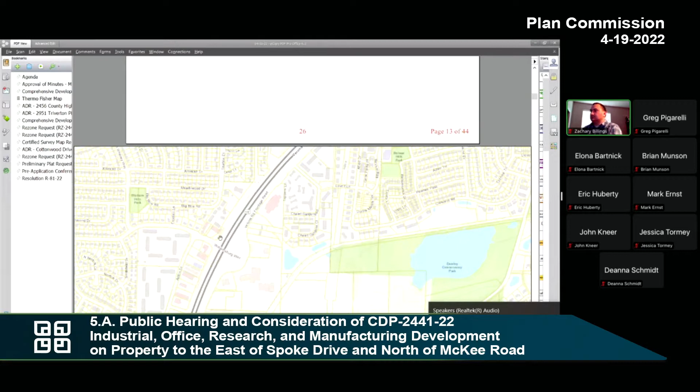I messed this up, a little hard to see. It's a little easier on the TV screens, I think. Yeah, and it gets washed out a little bit on the big screen. It's really hard to do it on here.

Can you guys pull that one up easier? Yeah. Just so the public knows, we are working on improving the projector in here. It's in the budget. Boy, I'm just losing everything. I'm sorry.

There you go. Oh, you had it. Yes, that's the one, thank you.

And the bike path is going in the middle of those 4 colored parcels, is that correct? Yes, that's the Badger State Trail reference. And the red piece is what they are piecing off and it sounds like plan to sell. Correct.

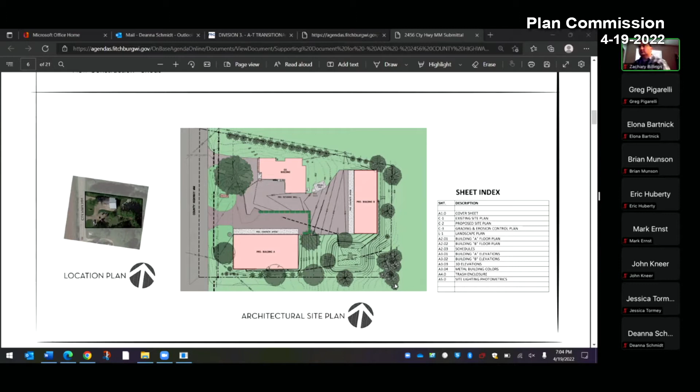The second building would be used for field operations and safety and training operations as well. That was basically it. That's it? Okay, yep. Can you do a staff report, please?

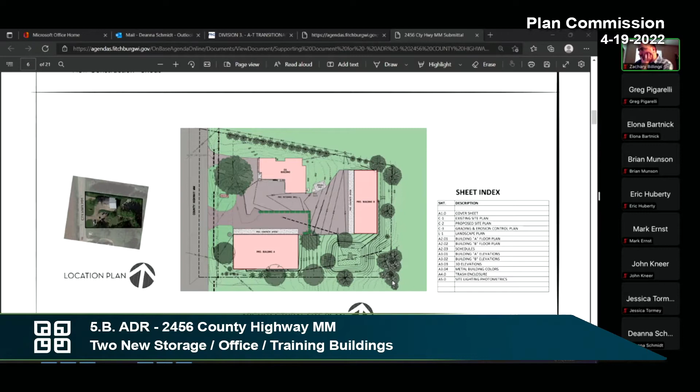I certainly can. This is 2456 County Highway MM. The applicant is requesting approval of an ADR for 2 new 1-story commercial buildings. Building A will be approximately 112 feet by 60 feet, and Building B will be approximately 110 feet by 40 feet. The development would also include some new asphalt paving and bioretention. This property is located predominantly in a residential area. The future land use map does not include this parcel within a future neighborhood planning area. Therefore, the future development of this parcel is going to be limited.

I realize I left something off there. The original application proposed 2 buildings, one of which would have had 4 new tenants. I brought to the attention of the applicant that this was not possible under the rezone and conditional use permit granted in 1994. That conditional use permit was granted to allow a contractor's office, shop, and yard, and staff believes that the current business, B&B Quality Building Restoration, is consistent with the original CUP. However, staff believes that it is not possible to add any additional businesses on this site. So the project was revised and brought forward to Plan Commission with just the one B&B Quality Building Restoration to remain consistent with the original CUP.

So staff recommends approval of this ADR with the following 12 conditions. All right, questions, comments from Plan Commission? That's it all. No one?

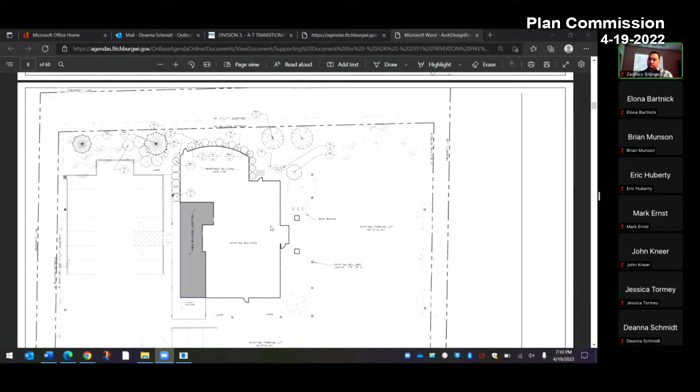And then interior, the current bar area of Liliana's, we're looking at redoing and turning into Ollie's, and then the northern part, that's our dining room, and that entryway area we're putting in, that'll be called St. Charles Station, so that I can finally have all my restaurants named after my kids again. So that's what we're doing.

And it's gonna be super cool, and no one knows about it, so all 39 people watching this on TV right now, shh. Could be 50. Could be 50. All right.

You want to do a staff report, please? So, 2951 Triverton Pike, and that's Liliana's.

The proposed development will add approximately 1,000 square feet and remodel approximately 1,800 square feet of the existing restaurant. The project will also include exterior renovations, which you'll see in your packet. The interior renovations will also allow Chef Dave to elevate his restaurant to fine dining. No additional seating is proposed, and the expansion is located on existing pavement, so there's no impact to the current impervious surface ratio.

The limited addition is unlikely to have any negative impacts on neighboring properties, traffic, or parking. The proposed exterior renovation is consistent with the previously approved ADR. Therefore, staff recommends approval with the following 9 conditions.

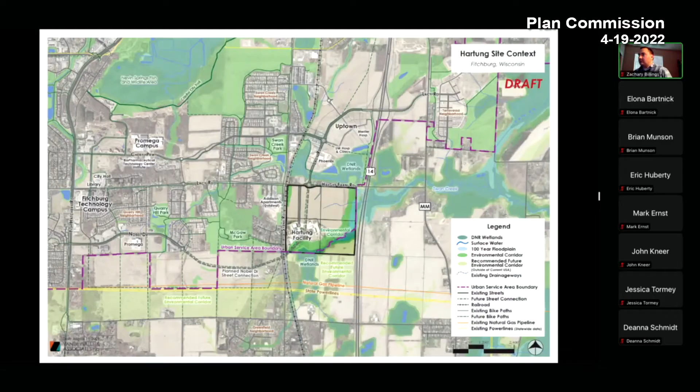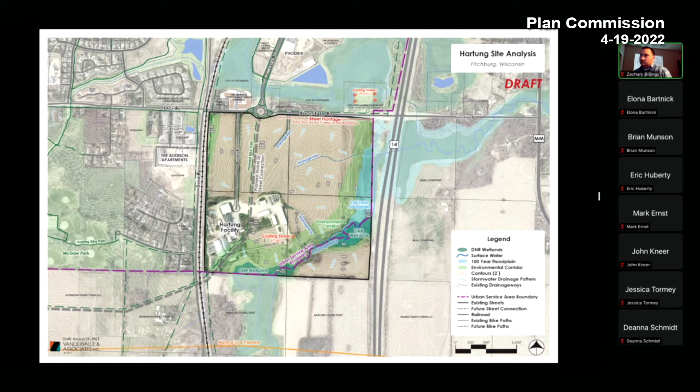As Jonathan noted, here is our location at the southeast corner of Lacy and Haight Farm. A little closer, you can see some of the existing conditions, with the Hartung facility in the southwest corner of the site, the creek and wetland complex that moves through the site, and then some of the existing plan recommendations. That's really where we started, looking at what the plan calls for, and how that relates and transitions to the geography of the site.

The CDP in front of you tonight really is that first step towards seeking zoning in the future for the site that would implement the recommendations of the adopted plan. And this is what it starts to look like in physical form.

What we're looking at here is between 450 and 500 apartments and 20,000 square feet of commercial space, coupled with the primary driver of the site being between 500,000 and 600,000 square feet of potential future employment, ranging from medical technology, office, and some logistics components on the site. So really building up from the concepts of the adopted plan and placing that into the site itself.

The other aspect of the site really falls in two directions, and that is the existing Hartung facility, which will stay in place and stay in operation as part of the development of the site.

So you can see a majority of the southwest corner will remain as is, with the only changes really being focused on how that is accessed.

The final piece of the site is the open space components. Again, as recommended in the adopted neighborhood plan, we have significant buffers along the native habitat areas, including buffers adjacent to the farm wetlands in the northeast and northwest corners of the site. So all in all, we're delivering an open space system that we look forward to working with the community on how to design, but we see that as an outdoor room that would serve both trail connections in the future for the region, as well as residents and employees of this site. We're excited to have that open space be a really critical component of the walking space of this neighborhood.

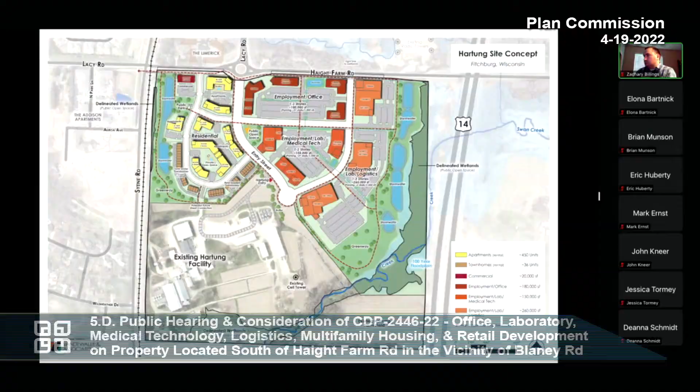Brian did very well and covered all the high points. The one thing that did come up in some of the staff discussions very early on was the buffers from the wetlands. The McGaw neighborhood plan delineates a 75-foot buffer from the wetlands on the northwest portion of the site and a 300-foot buffer from the wetlands on the south branch of Swan Creek, to the southeast of the site. You can see the wetland complex and then Swan Creek.

We've worked through that, and throughout the wetland complex to the southeast, there is a minimum of a 200-foot buffer with an average buffer of 337 feet. This recognizes the fact that the northern portion of those wetlands, as Brian mentioned, were farmed. Staff feels that the proposed buffers accomplish the goals of the McGaw neighborhood plan.

The other note I'll bring out is that there are things to be determined down the road in the future, and that would be establishing a connection between Lacy Road and Nobel Drive. That's not something we can really dive into at this particular point with the existing Hartung facility. So staff recommends approval of the CDP with 7 conditions.

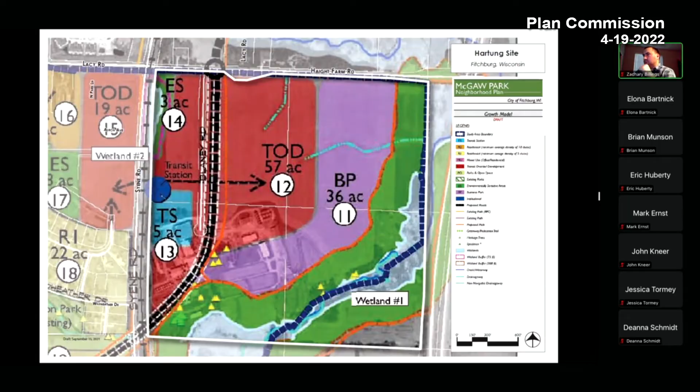So from the standpoint of timing and the availability to have that in the future, should the city determine that's in their goals, that's not precluded by this. That is preserved by that site remaining in use. I believe one of the staff conditions was that, in the event the Hartung facility was to be redeveloped, that would be a discussion point that needed to happen at that time. So we're certainly respecting that in the plan and reserving that space for the future should that need arise.

All right, very good. Thank you for the clarification.

Other questions or comments? Yeah, Emily. I really appreciate that clarification on the transit. But the one thing that concerns me is, if it's 10 years from now, 20 years from now, prices will have gone up, most likely for the land. So then it kind of puts the city in a position where we'll have to pay a lot more for it if we want to develop that as transit.

I'll just say I really appreciate that it does follow the plans that have been in place for quite a while now. I think we see that sometimes where people come in and want to do something completely different, and when we're planning, it's a challenge to have that happen. And I know there is a lot of demand for, well, apartments—unfortunately, but not that apartments are terrible, I just like single-family housing or more of that as well. But this is a transit-oriented neighborhood, so unfortunately it leads to more of the higher density development that we have in something like Uptown.

But I'm really excited about the potential for new businesses to be able to come to Fitchburg. We have a lack of bigger properties available for businesses, and we do get requests from businesses looking to relocate asking what kind of larger pieces we have. There's not a lot of those in Fitchburg right now, so to provide this as an option for those businesses, I think is a great advantage. There's great visibility to Highway 14, which is very attractive for those businesses, and the Lacy Road is right there and goes right to that interchange.

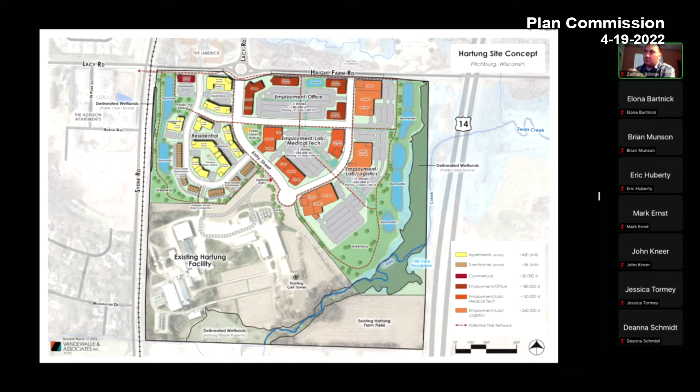So I'm happy about that, I really love that part. I'm excited about that. This is already in the urban service area and has been planned for development for a while. So it's only natural that this would be an area that was planned to be developed and is going to be developed over a period of time, obviously, because Hartung isn't going away anytime soon.

Stephen: Question for city staff—since most of this property on the future land use map is designated for TOD, transit-oriented development, can you walk us through what the original intent was for that? Mixed use, high density, residential, commercial, retail, office—more of a downtown kind of feel. Okay, thanks.

Other questions or comments? Rich? The housing comments we've heard—it's like a chicken and the egg thing, because in order to attract business we want to have the housing, and they go back and forth. But I looked at the Zimmerman's housing study from 2018 earlier today, and at that time we already were among our peers, had one of the highest percentages of renters of all the peer communities.

I think this will soon be passed, but I think as a group we need to get together and start talking outside of these issues of how we want to address this so we can all be on the same page. Yeah, I don't want to get too off topic.

In my budget right now we have plans to start neighborhood planning for both South Stoner Prairie and Greenfield, just south of this. As we develop those neighborhood plans, that's a big thing we have to factor in - we're over 50% apartments in housing units in the city right now, and we're the only community in Dane County in that situation. What I hear from residents is concern about where that balance is. As we develop those plans, we need to make sure there's ownership opportunity available to balance that back out. My point is, it's not to be put on their shoulders - that's something we have to deal with, not say this is what we want you guys to solve for us.

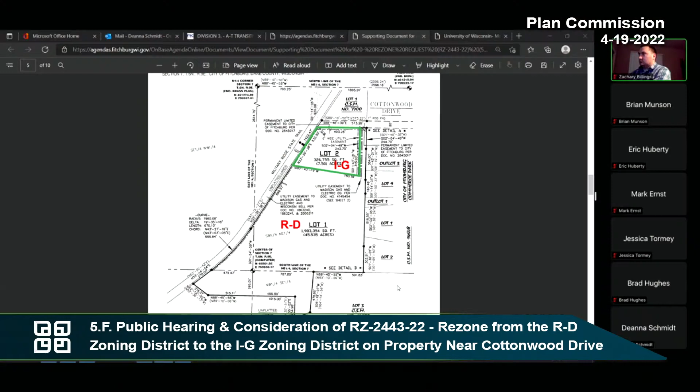I definitely know the long-term plan is for that 80-foot corridor, which is on the flagpole part of the lot there, is planned to be a public street in the future that would extend further down into Lot 1. In terms of the intersection where it hits Cottonwood, I don't know if that becomes where the dominant movement is to the east, and you try to force everybody to the east in terms of moving cars through that area as a throughway, with a stop condition to the west.

I think there could be ways to try to make that the dominant movement. But right now, if we shrink that Lot 2 at all, that sends things back to the drawing board and I don't know when things would move forward. If we don't get this much land, General Beverage has indicated they need this much land to be viable, otherwise they're going to have to look at another spot. So that's where we're trying to get the site that's viable and fits with how the site's being used now, so we're not going to impact that driveway, and in the future that becomes a public street.

In terms of that intersection there with Cottonwood, I feel like there could be some ways to offset the potential for people cutting through private property.

Yeah, I guess that'd be my comment, is that before anything gets built, they have to come back again, and it needs to be addressed, because it is a very legitimate concern, and if it's not addressed, then in this next round of approvals there's going to be problems. I don't know what that solution is, and I'm not going to try and solve it right here, right now, but I think that's something to bring back to the people you work with, and maybe Deanna, you can reach out as well, because I think that's a very legitimate concern and something that needs to be addressed as this comes forward, because I agree it's not fair or right that the other business would all of a sudden be the road through there. So whatever we can do to have no impact on them, I think we need to try and accomplish. That's my thoughts anyway.

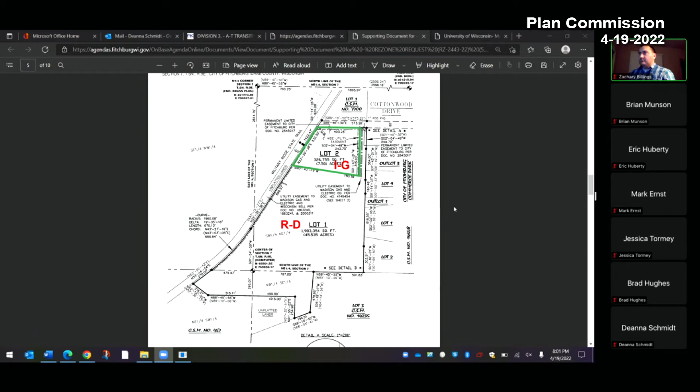I guess in that respect, I'd kind of like to know what the plan is, because otherwise you may need to change your CSM, since it doesn't sound like you can really take any land away from the needs that General Beverage has. That's right.

So I've been very sympathetic to the Midwest Stone people, but I'm also now just kind of thinking through this more. If that becomes a city street or an access point, why is it that traffic is so pervasive through your property? My understanding is that you have this throughway because you can't take a left off of your property onto PD to go west. I guess as a driver, why would I go through, because it's gravel, right?

Was there last spring? No, it's... What I'm getting at is this doesn't seem like the best throughway as a driver to get from Payne and Dolan up to PD, no matter which way I'm going, but especially not if I'm going westbound on PD. But if I'm going eastbound, why would I not go over to the lighted intersection instead of driving through your property? Like I said, I was there last spring, I thought it was mostly sand or gravel, or is that plowed all the way through? It's quicker. Asphalt on that part, okay.

Yeah, but when they did the reconstruction in front of us on PD, they put a little loop turn there right past the bridge as well, so you can come out our drive and actually do a 180 before you get to the Kwik Trip there. So it wouldn't be convenient for somebody going down Cottonwood or coming back the other way. But if you're at a T section, going straight through is so much easier than going to the road or cutting through. I guess it's a matter of convenience for people. There's no obstacle to stop them from going straight through. If it's offset, you have to make a turn, and then another turn, and it becomes a little bit more of a problem.

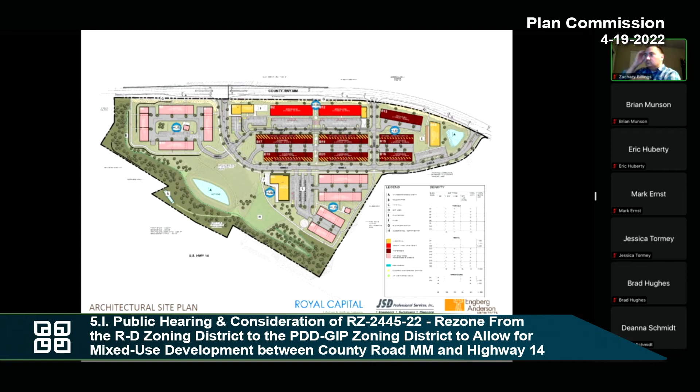This is now step 2 of a 3-step zoning process. We will be back with SIPs and really appreciate the comments that staff raised regarding the design of buildings and the articulation of buildings - that component comes in front of the body at the SIP stage, but we've taken those comments to heart and we're continuing to work on those to make sure we design a project that fits the site itself.

Taking that grade as an opportunity, stepping buildings down the slope, and creating differentiations and articulations in the design of the buildings throughout the project. We're still very much interested in creating a really interesting open space environment in this project, so we see the grade and the transitions as opportunities. There are some challenges, we wholly admit that, but we see those as opportunities to create some very interesting spaces and continue to pursue the idea of hubs and walking connections in addition to the sidewalks and orientation of the buildings out to the streets to really open up this site to the general community.

So we're excited to do that and appreciate all the comments staff have had to date and really look forward to working with everyone as we move into that SIP stage. Yep.

Anything else? We can do staff report. Brian, once again, was very thorough.

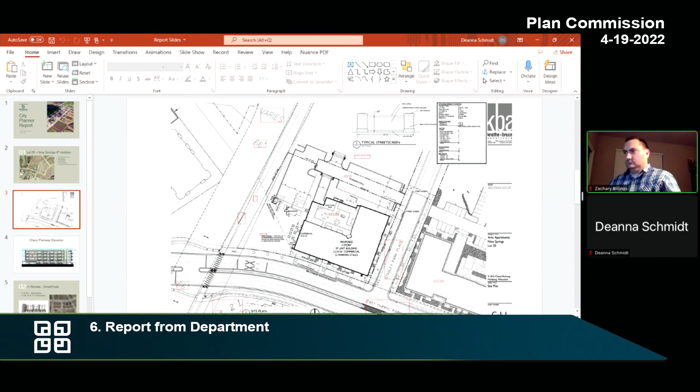Hopefully that'll be something kind of cool. The bar and restaurant would be down in this part of the building, underground parking, outdoor seating area, seating space right in here. And then this is what it looks like, the elevation.

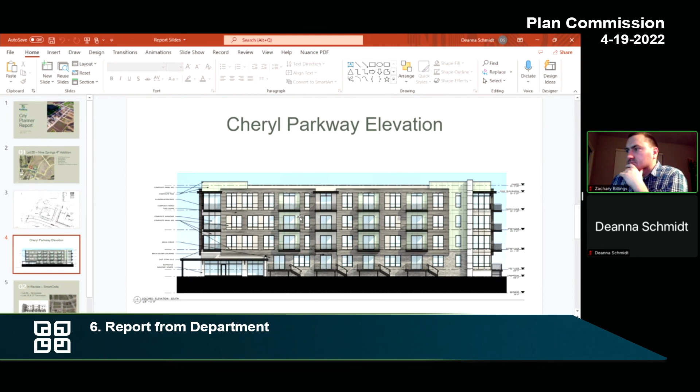So I just wanted to get started on that. I'll bring you Lot 56 in Terravessa next time we get together. If there are updates or things you're interested in, give me a heads up and I'll put together something in a department report. That's all I got.

And one other staffing thing, if you didn't hear, Wade is also leaving. He's taking a job with the DNR. So a little more staff changes as well, unfortunately. But I'm really happy for Wade, I think this is really his groove, I think he'll be really, really good there.

And I believe you're also taking the opportunity to just look at the roles a little bit and see if there are any changes you want to make to the roles in the department. A little bit, yeah, we're doing some talking. Opportunity for everyone, yeah.

All right, so that's all the announcements I have. I just want to say quick, we're really going to miss Wade at Ag and Rural. He's been a big part of that committee for a long time, and a big part of a lot of the plans we put together. He's done a great job over the years, and we appreciate it. And I would echo that with H&I too.